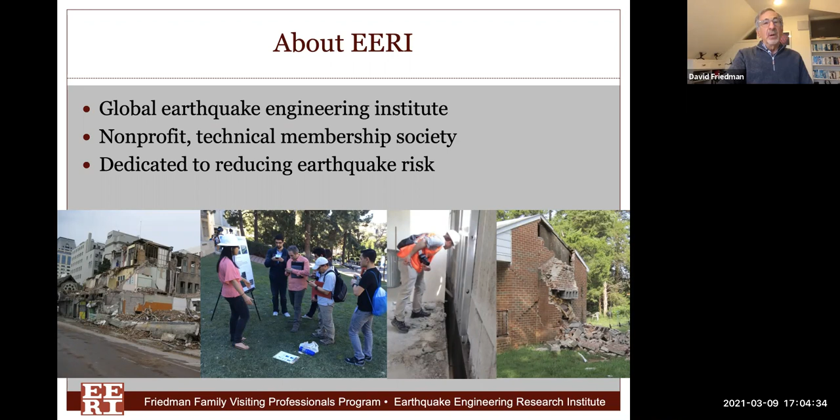Thank you. So, this is kind of a public service advertisement for EERI, but I got involved with EERI maybe 30 years ago, just as a volunteer. Became a member and started attending annual meetings, and then gradually got more and more involved. For those of you who don't know EERI, it's a global earthquake engineering technical organization. Its mission is really to advance the science and practice of earthquake engineering and reduce earthquake risk around the world.

The best part of EERI is who makes it up, and whatever discipline is our specialty, there is something about rubbing elbows and getting to meet people who come at earthquake engineering from different perspectives beyond your own. You see here who are the members. I found it particularly interesting meeting and getting to know and working with social scientists, people working on disaster planning and disaster recovery and kind of the human side of what happens after a natural disaster.

Particularly the Learning from Earthquakes program is really the program that kind of knocked my engineering blinders off and made me really understand that an earthquake doesn't just affect the buildings we design, but it affects whole neighborhoods, whole cities, and is a regional disaster.

There are many activities within EERI. For student members, and for after graduation, there are lots of ways of getting involved. There are regional chapters that are really very interesting to get involved with. I highly recommend it. I'm preaching to some of the already converted who are EERI student chapter members, but all of you, even if your discipline isn't necessarily earthquake engineering, I really think there's something about this organization that will set you on a learning path through your careers.

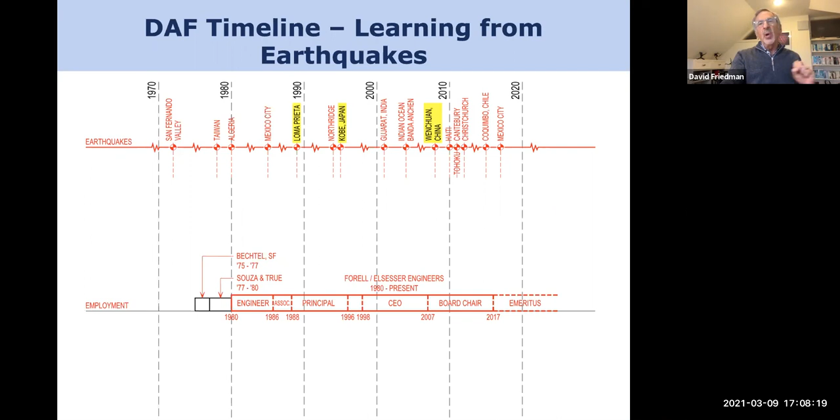I mentioned earthquakes, and I have added to my timeline the earthquakes, and not just the earthquakes that happened during this time period, but each one of them in some way or another affected my career. Affected my career relative to, I was on an EERI reconnaissance team, or there were significant code changes that happened because of those earthquakes. The first one is the Great Earthquake of San Francisco.

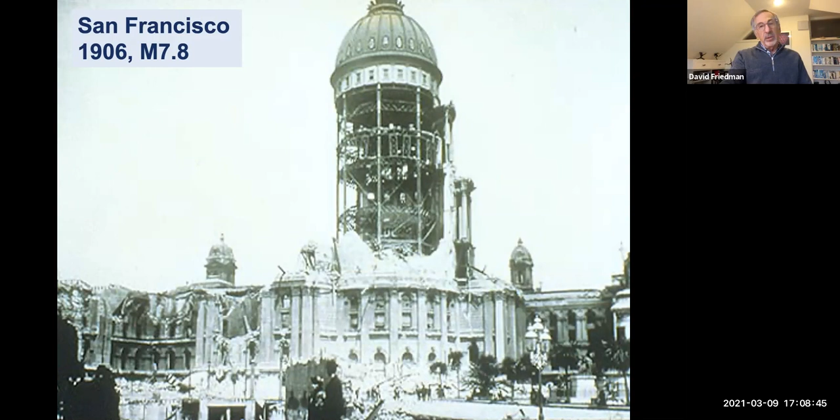No, I wasn't alive here, but little did I know that the replacement building was going to be one of the big projects of my career. What's very interesting about this earthquake was not just the ground shaking that lasted 63 seconds, but the fires that happened afterwards, adding to most of the destruction of the city.

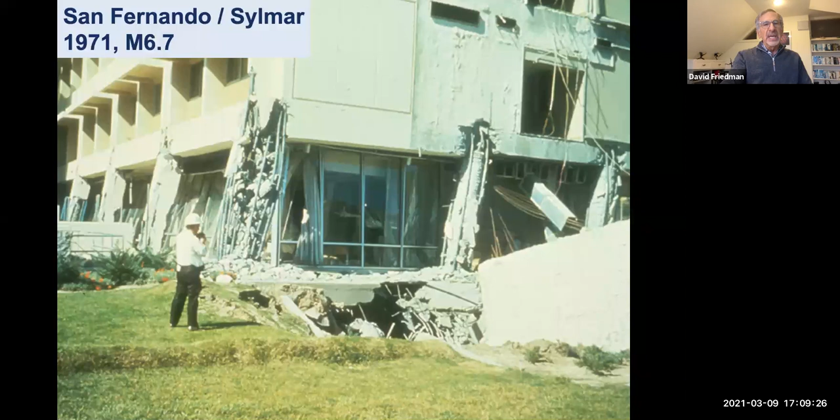1971, I was still in school, but this was the San Fernando Sylmar earthquake. What was important about this earthquake, photographed here, is the Olive View Hospital. It was after this earthquake that we changed our codes specifically for essential services buildings, that we knew that hospitals needed to have a better performance than shown here. I think also this was when we really woke up to the need for ductility in our designs. There was no transverse reinforcing in those columns.

The Loma Prieta earthquake. In a way, this earthquake was the bane of my existence professionally, because the earthquake was really not a big earthquake. It was maybe bigger for Santa Cruz, but not for San Francisco. Some celebrated damage, but it was also only 8 seconds of strong ground motion. If it had been twice as long, it would have been tenfold the amount of damage.

But so many clients, so many people I run into, building owners, say, my building survived the big one. And I went, really? This building was around in 1906? They say, no, 1989. So getting people to understand that that really was not a big earthquake has been really difficult.

Northridge, 1994, I was in practice at this point. There were maybe 7 or 8 parking structures that fell over, and it was just because of the aspect ratio of the diaphragms, not necessarily a strength issue or a shear resistance issue.

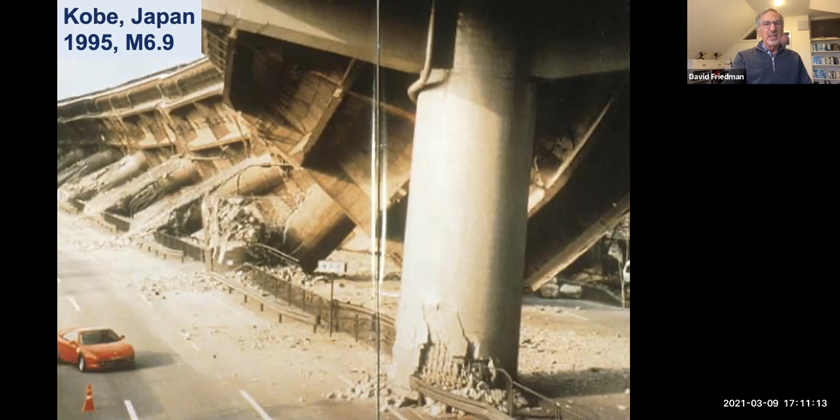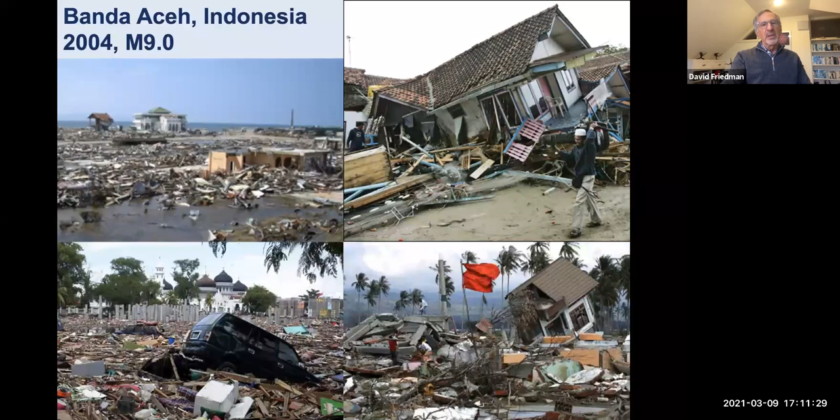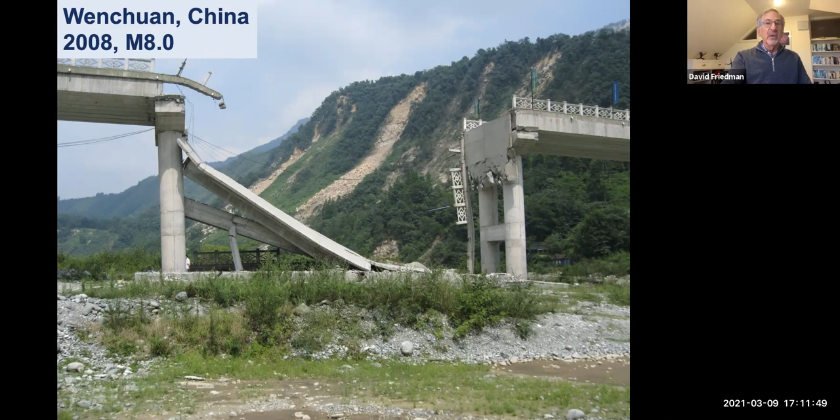Banda Aceh earthquake in 2004, we really didn't start talking about tsunamis until this earthquake. And this was the real story of this earthquake, the massive, massive tsunami that happened afterwards. Wenchuan, China, I was on this reconnaissance team as well. I think there are lots of lessons of this earthquake. A lot of it was the earthquake-induced landslides that happened in the region, in some cases so big that they wiped out entire cities.

Haiti, 2010. The tragedy of this earthquake, maybe the learnings weren't the code changes, but it was more the devastation that happened to this country, where they measured the amount of damage as 2.5 times the gross national product. And no wonder they've struggled to recover from this earthquake.

Christchurch is very interesting, a more contemporary earthquake in a country that has great codes and great engineers. There were actually 2 earthquakes within 4 months of each other. The second one was actually lesser magnitude, but was a shallow earthquake underneath the city of Christchurch and had a totally devastating impact.

And then Tohoku, Japan, this was another large magnitude earthquake, and of course the story of the tsunami. But one of the things that was really interesting about this earthquake was, we talk about earthquake magnitude, and people get fixated on what the magnitude is, but it's also the duration of strong ground motion. And in the case of the Tohoku earthquake, the strong ground motion lasted 2.5 minutes. So that's why there was so much non-structural damage far away in Tokyo, Japan.

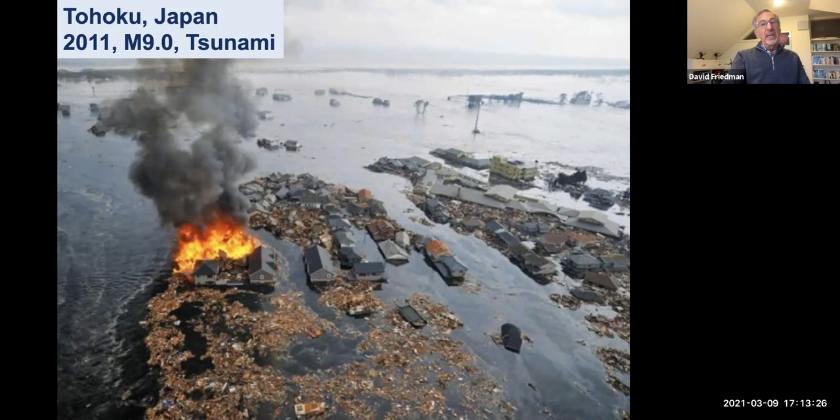Some lessons learned in my engineering career. My favorite definition of structural engineering is this: structural engineering is the art of molding materials we do not entirely understand into shapes we cannot precisely analyze, so as to withstand forces we cannot really assess, in such a way that the community at large has no reason to suspect the extent of our ignorance.

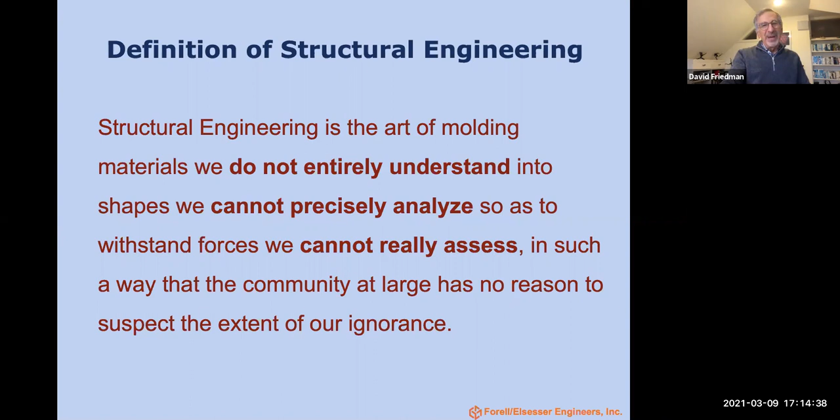Now, we're really not ignorant. We try to be quite educated and quite smart. But what this does talk about is there's a lot of uncertainty that we have no control over. I mentioned the earthquakes, the magnitude, the ground motion, the vibration content. But we also have to acknowledge that as we talk to people about what we do, there's a lot of things that we have to talk about in probabilistic terms. And once we talk in probabilistic terms, we lose people very quickly. And so we have to understand what it is we're trying to convey to people.

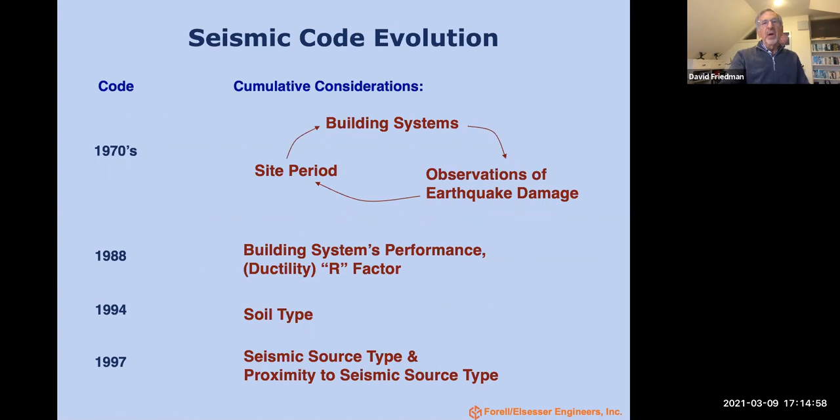Some of the issues that we face as structural engineers is the code, and the code's constantly changing. I mentioned we chase earthquakes around the world, we learn from them, and we change the codes. One thing that has never changed about the code, at least as far as the seismic provisions, is that it's a minimum standard. And what does that mean? Minimum standard is for life safety. It means that we design buildings so people can safely get out of the building. It doesn't mean you can get back in the building.

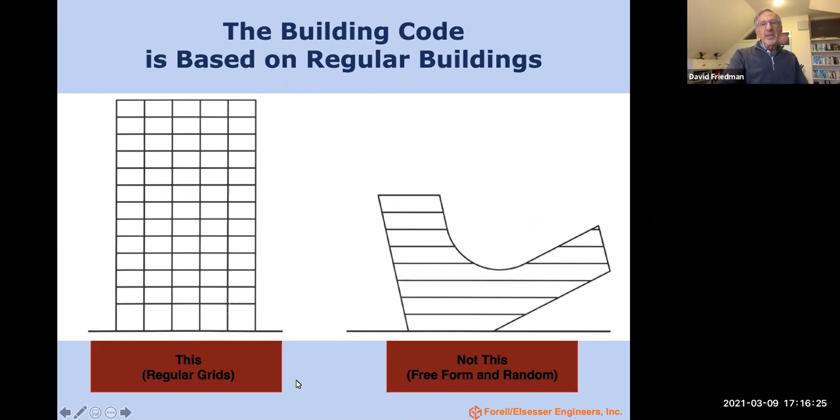The code also anticipates that we're designing regular shaped buildings; it doesn't quite as much envision the irregular buildings that architects like to design, like this, or like this. This is in Prague, Czech Republic. Some people think it's an after earthquake photograph, but that's the design. But our challenge as practicing engineers is to put regular systems, regular structures, to make these buildings stand up.

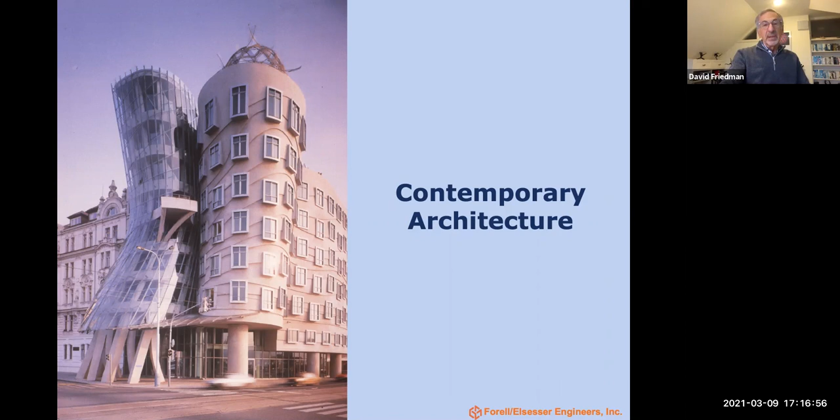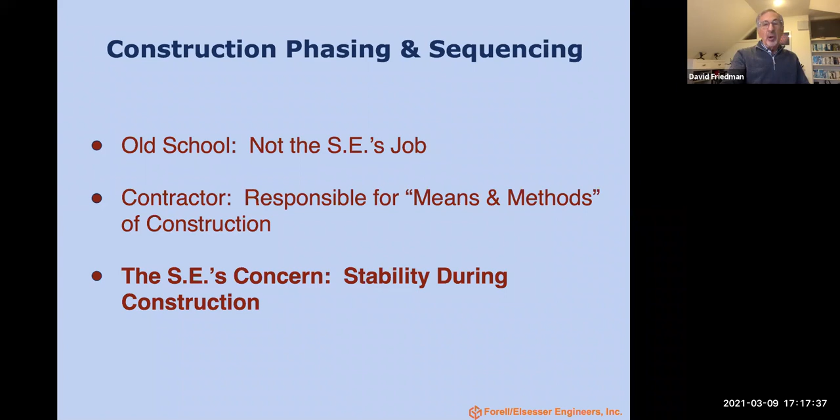You'll see when I talk about a couple of projects, engineers of record only promise their buildings are safe once the buildings are completed. But a large part of my project history was in seismic retrofits to historic buildings, and some of those buildings were in construction for 2.5 years. Generally, the engineers of record are not responsible for stability during the course of construction. But in some cases, we had to be concerned about stability during construction because of how long it was going to take. And I'll show you some of that in the San Francisco City Hall project.

Sustainability has become a big buzzword in design, in architecture. Usually sustainability refers to energy and energy use, energy design. But they kind of forgot about seismic sustainability along the way. And now seismic sustainability has given way to talking about resilience. How long does it take for a building or a community to recover? These have been some of the areas that later in my career I've become more and more impassioned about and an advocate for.

The other thing I want to impart to you is, engineers get a bad rap, maybe deserved, but they're considered not to be particularly articulate and literate. I think we actually are, and we can be, but we do have to acknowledge that we're in a tough position because we need to be able to explain what we do to a lay audience in a way that they can understand it. There's a number of times where you're writing a report and you have to understand who your audience is. So spelling and writing and speaking quality does count in professional practice.

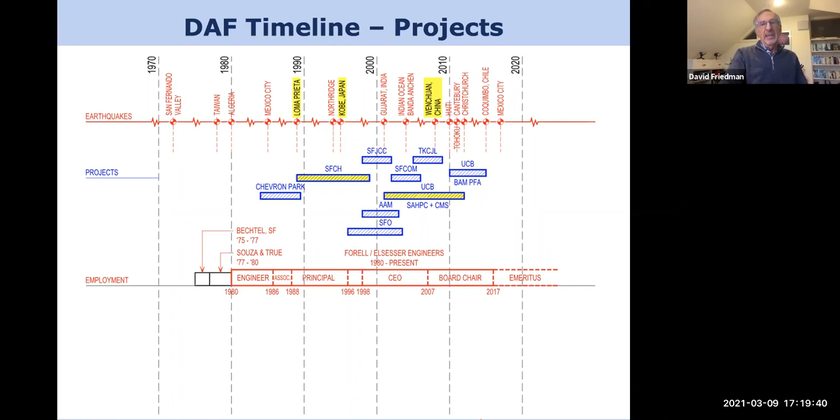So projects. I've done a lot of projects in my career. I'm really going to talk to you about 2.5: the San Francisco City Hall, this first project, which really consumed about 10 years of my career, and then the seismic safety corrections of California Memorial Stadium. And again, a lot of these earthquakes and code changes really impacted a lot of these projects. The first project I'm going to talk about is the base isolation retrofit of San Francisco City Hall.

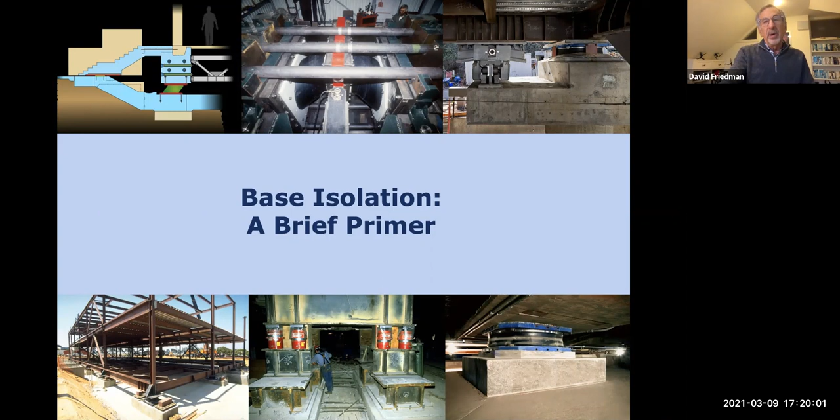I'm not going to assume that you all know exactly what base isolation is, so I'm going to give you a brief primer on what it is. So what are base isolators? There are really 3 kinds.

Bearings were used on bridges for a long time, but they really hadn't been used in an aseismic capacity. One of the most common types is a high damping rubber bearing, pictured on the left. There's some variation of it, the same kind of high damping rubber bearing with a lead core placed in the center of it that allows for more energy dissipation.

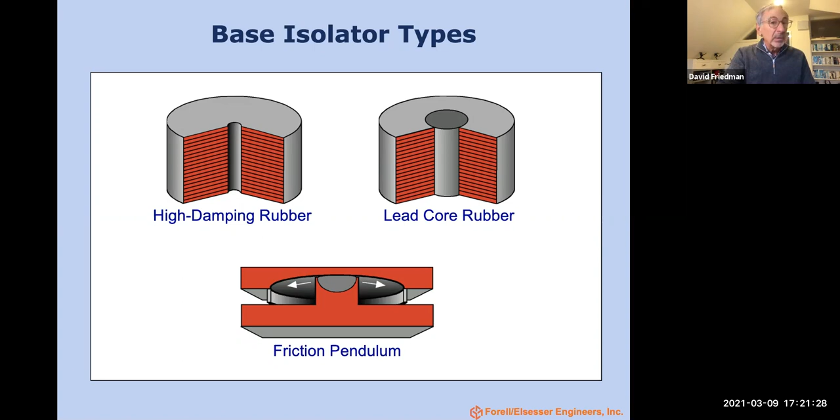And then there's the friction pendulum, kind of a different kind of concept. But all of these are vertically very stiff and laterally flexible, because this is where the energy of the earthquake gets dissipated. Order of magnitude of size: the high damping rubber can be 20 to 24 inches tall, 30 to 36 inches in diameter. The friction pendulums can be anywhere from 3 feet to 6 feet square, usually. We're agnostic as to what kinds we prefer.

There are two basic reasons why you base isolate a building. The first one is pictured here. Most fixed base buildings, and a fixed base building is anything other than a base isolated building, are going to withstand interstory drift. From floor to floor, the deflection of the building is going to cause it to drift, and that drift is what causes damage in the building. When you base isolate the building, most of that deformation is happening in the isolators. And so you have to design a building for a lot less interstory drift, because the whole building is moving more monolithically.

The other reason that we base isolate a building is because of the period shift. So again, most fixed base buildings are in this lime green zone. A lot of the buildings we design are in the half a second to 1 second fundamental period of vibration range, and that puts you right at the peak of the response spectrum. But the base isolators have a fundamental period of vibration of between 2 and 3 seconds.

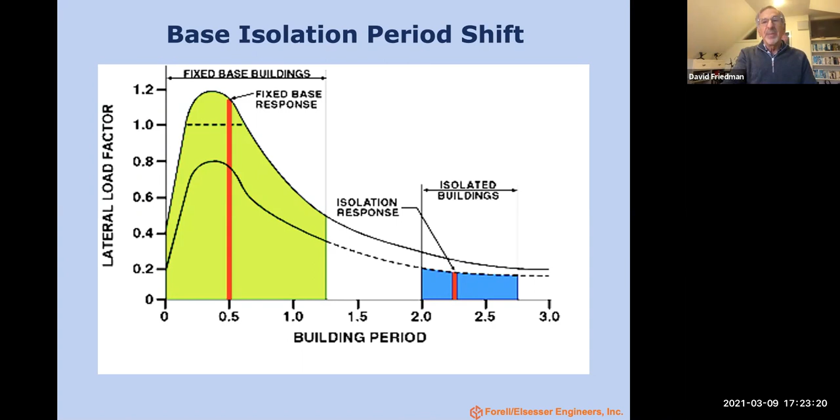So if you read across, with a fixed base building, you get something like a 1.1 G lateral acceleration, but in a base isolated building, you get about 0.2 G. So you can see the benefit of the period shift and the reduction in spectral acceleration on the building. So that's essentially why we do it.

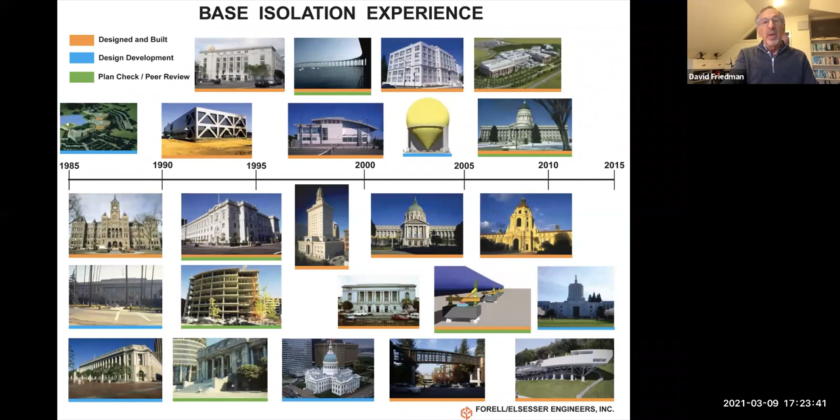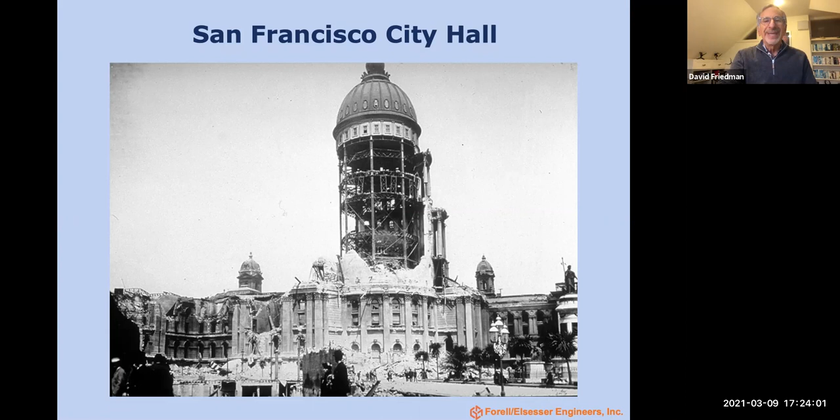We started doing base isolation retrofits. The very first one was a city and county building in Salt Lake City, which was the precursor to the next one we did, which was San Francisco City Hall. This is San Francisco City Hall, the building that was built in 1915 after the destruction of the building that I showed you in 1906. This shows again the damage where most of the brick cladding had been shaken free of the building.

This shows basically what we did in the retrofit of the building, and all I'm really going to talk to you about is the base isolators at the base and how we got them in. It involved putting in new foundation systems, creating this isolation plane, cutting the columns, tucking in the isolators. But then we also had some strengthening to do in the light courts on each side of the rotunda and the drum and the dome of the building. You can see in red some of the steel transfer systems and strengthening of the drum that supports the dome of the building.

This was actually the main reason why we base isolated the building, because had we done a fixed base, we would have actually had to have strengthened or rebuilt the entire dome, the inner dome and the outer dome, and that would have been cost prohibitive. So remember, we were doing this in the late 80s, early 1990s, and we were trying to explain to a client what it is we were doing.

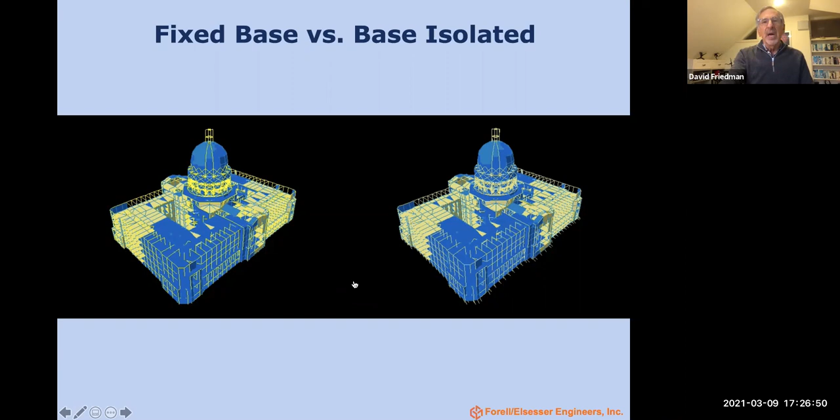The main trick here was, how do you get the isolators in? A lot of our detailing had to be around the sequence of construction. I mentioned that we certainly weren't making the building a lot stronger. In fact, during demolition at the first floor, we were taking out a lot of brick and terracotta walls, so we were actually making the building weaker.

So we designed a rather large temporary bracing, which was all around the building. We felt we needed to design it ourselves because we'd design it to a different level than the contractor would have, who would probably have installed some rod bracing that wouldn't have worked. What you're seeing in this photograph is we've done a lot of excavation around the existing footings, put reinforcing in, and scraped off the concrete fireproofing to expose the lead paint on the steel columns.

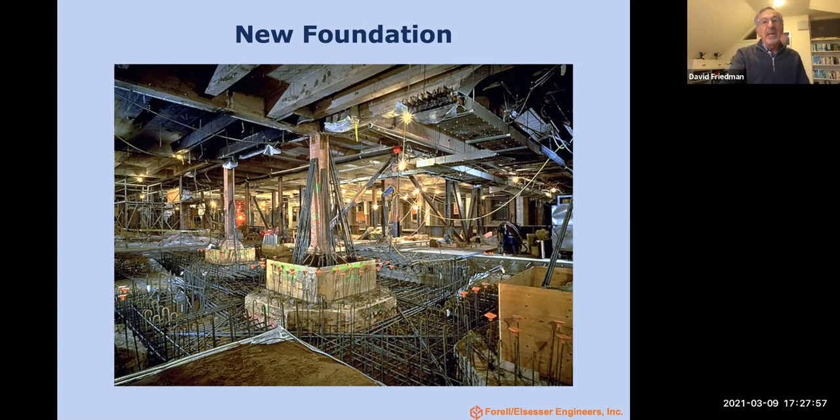Here you're beginning to see a number of things happening. You can see where we've scraped off the paint. They've installed these very, very stiff steel beams that clamp and sandwich the column. They're supported on spreader beams here, and then these are the hydraulic jacks. You can see this is the apparatus getting started.

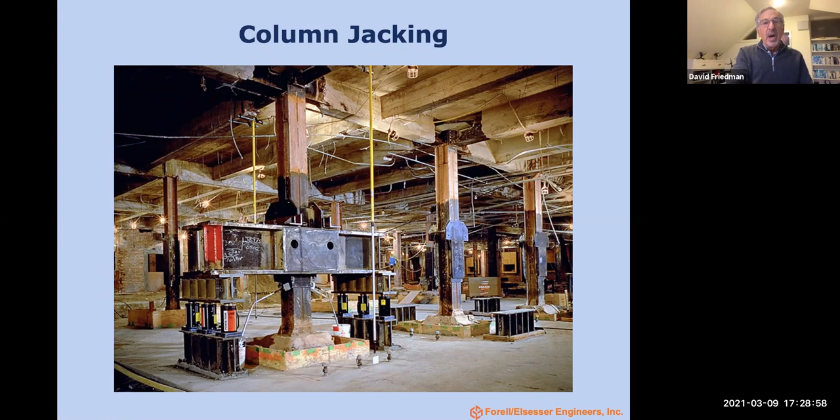In each of the 4 quadrants of the building, we limited ourselves to only doing 3 columns at a time. Once this apparatus was in place and clamped, there was a load bypass, meaning the load coming down to the column, by the stiffness in these girders, was being transferred here, so we could activate these jacks and infinitesimally jack this up to release any load coming into the column.

Then we come in and cut the column here. Then we eliminated the old foundation that was there, poured a new foundation, and put in setting plates for the new isolators. These pictured here are the columns, the 5 columns that support the rotunda.

So each of these had 4 isolators in them. Over here on the left, you can see an isolator has been installed. You can see the beginning of what we call the cruciform steel floor framing, vertically very stiff because they're only 14-inch deep girders, where we use column sections for the floor because we're fighting for every inch here.

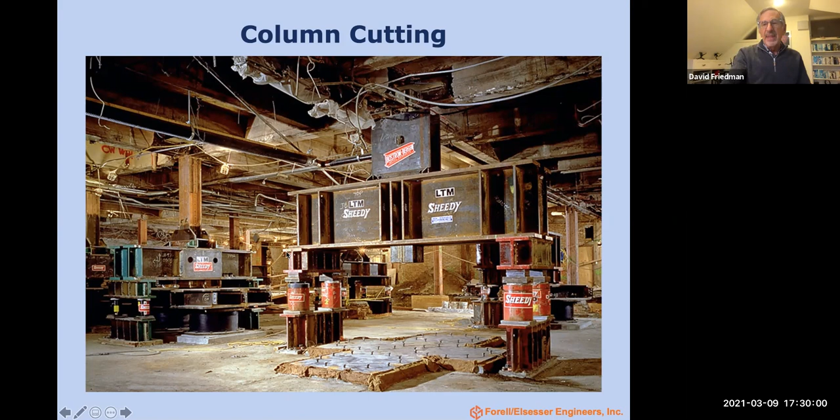This shows a whole row of columns ready to go. The isolators are in, the cruciforms, and more floor framing would be attached to these. Interesting here is each isolator had a locking plate. There are 538 isolators in San Francisco City Hall.

I may have that number wrong, but these locking plates were important because until we had all the isolators in, until we had the floor completed and the concrete diaphragm in, and in fact the rest of the strengthening of the superstructure of the building, we didn't want the isolators activated. So only after the project was done did they have to go into the crawl space and remove all of these locking plates. This is more of the floor framing in.

Again, that isolator plane was competing for a lot of space. We also had to be able to come in and inspect and remove every isolator. So there are access ports located throughout the building to be able to inspect the isolators after an earthquake, and they're required by code to be tested, or at least a couple of the isolators tested, at every 5-year increment.

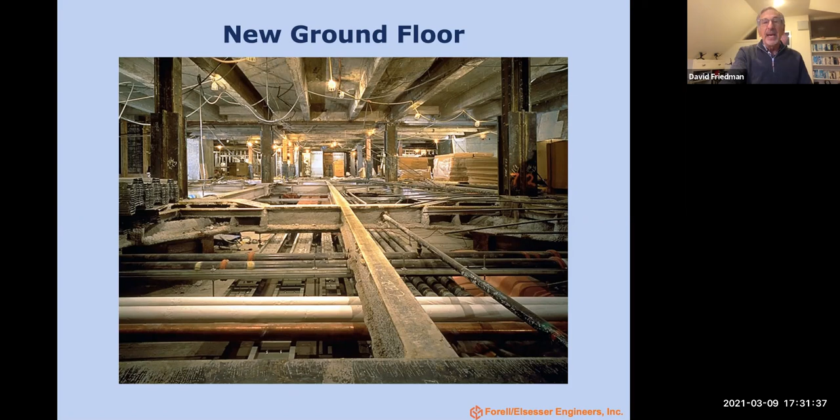I'm going to show you very quickly one other project. The story here is this was a different delivery system, what we call design build. So there was an architect, an engineer, and a contractor design team involved in the project before us, and then it was handed over to the engineers of record. Basically that is to find some efficiencies in the design of the building.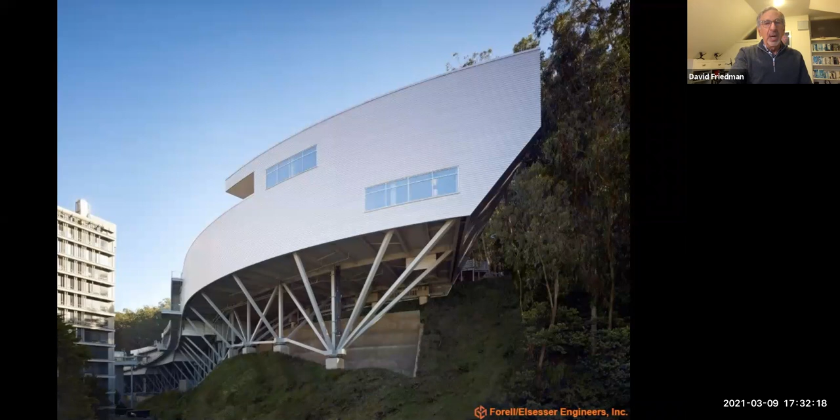This building, this is a finish shot. This was one of the most difficult projects we worked on from a site perspective and architectural perspective, because they came up with a very serpentine building.

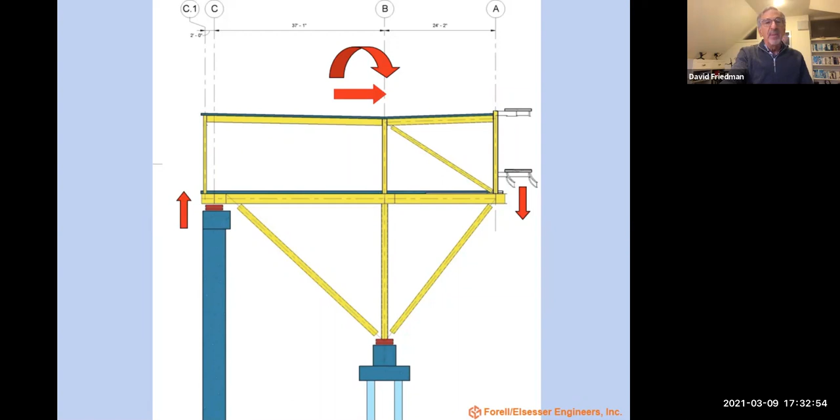They had already decided that this building would be base isolated. They'd already procured the friction pendulums for this, but they hadn't solved one issue, which was the overturning on the isolators. Because of the small aspect ratio, this was not a heavy building, so there was a net uplift on the isolators.

The isolators, again, these were what we call the triple friction pendulums. Their uplift restraint were these little strapping devices. And for the excursions these isolators were going to undergo, those strapping devices weren't going to survive, let alone be there for any uplift resistance.

So we had to solve this problem, and we had to be more mechanical engineers than structural engineers. One of our engineers had an idea of how to make a restraint. Over a weekend, he took his son's rollerblades apart and came up with this concept.

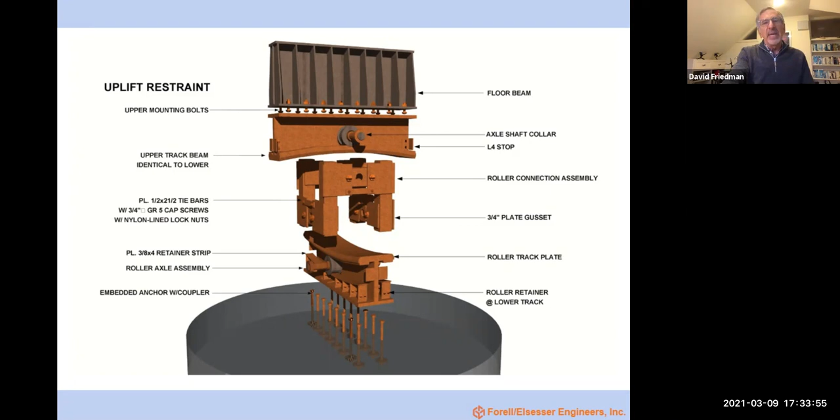That concept turned into a mechanical system able to handle the three-dimensional motion and provide a clamping so that the uplift could be restrained. It wasn't done within the isolator, it was done adjacent, which is why we have very stiff load transfer elements here, but this was the actual uplift restraint.

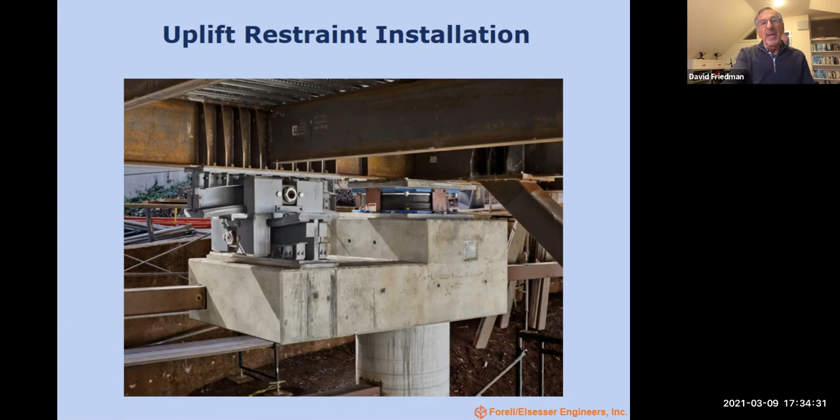Again, you can see even in the friction pendulums, we had these same locking constraints in the building so that it was locked in until the building was completed.

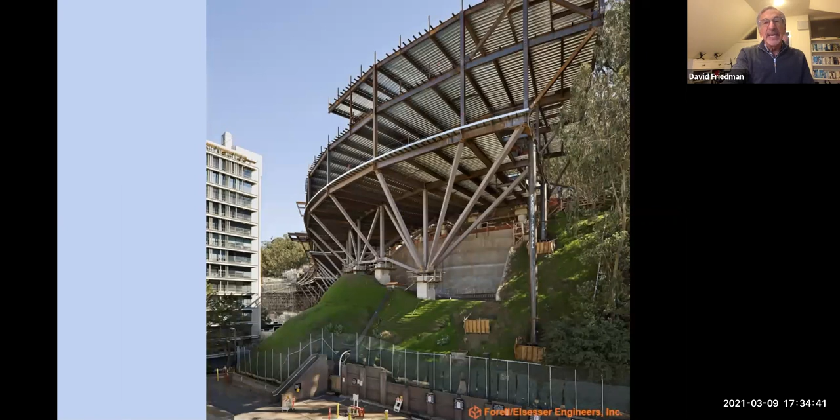We had to test these down at UC San Diego. This is actually the finish of the structure. I kind of thought it looked like a piece of art and kind of wish they had just stopped there. But again, look at the serpentine nature of that building. When we started this project as the engineers of record, there was a problem we didn't know we were going to have to solve, but we did.

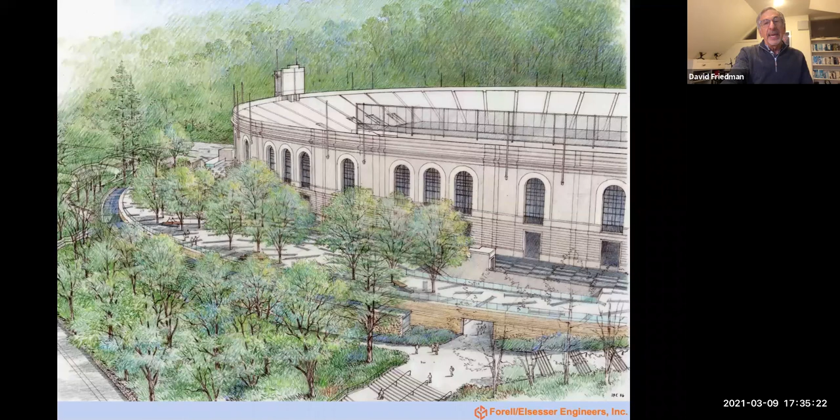California Memorial Stadium. This was another 10-year spanning project in my career. There were actually two projects. One was a high performance student athlete building, a crescent-shaped building in front of the building. That was done first to decant the building.

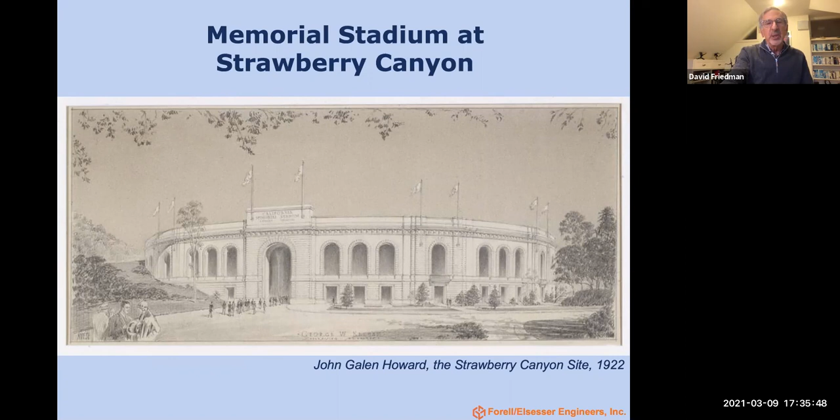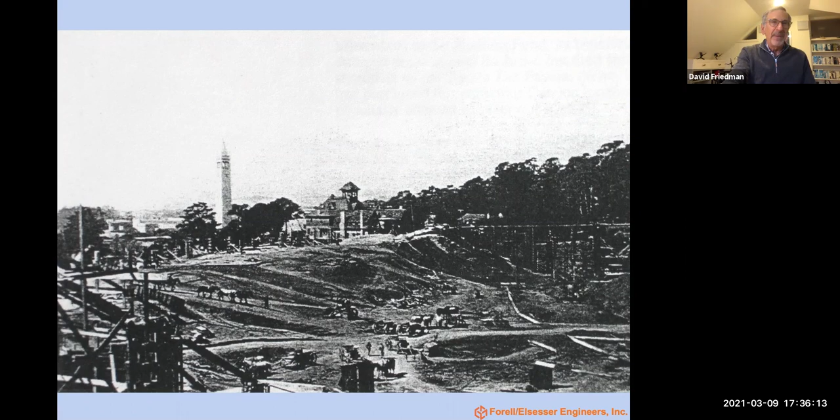This project took 22 months, and maybe about 3 years to design. It wasn't helped by the fact that we were delayed by a large amount of litigation from the city and the neighborhood association. This shows part of the West Bowl, which was a non-ductile concrete structure.

Many of you know of the seismic activity in the Bay Area. We were dealing with the active Hayward fault. We knew that the fault was there, and we knew it ran under the stadium, but we didn't know exactly where it was.

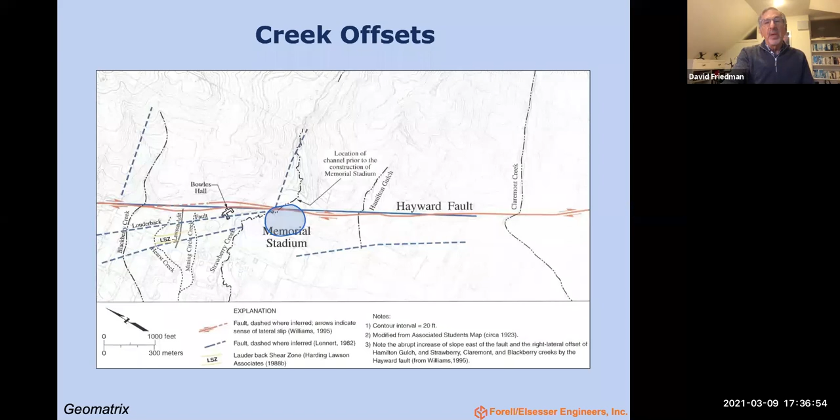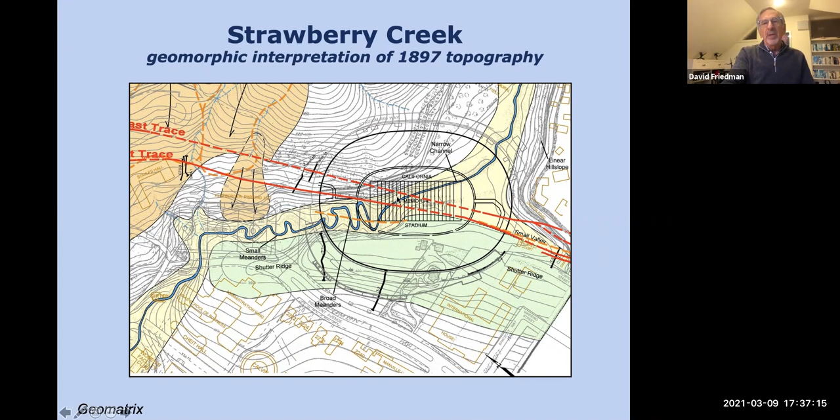We were forced to do a fair amount of trenching, particularly for that precursor project, to make sure we weren't getting faulting activity under a new building, because you're not allowed to build a new building on top of an active fault. We knew the fault was somewhere in these areas. In green were the trenches that were dug. These trenches resulted from litigation, basically to prove the fault was where we thought it was, and not where we thought it wasn't.

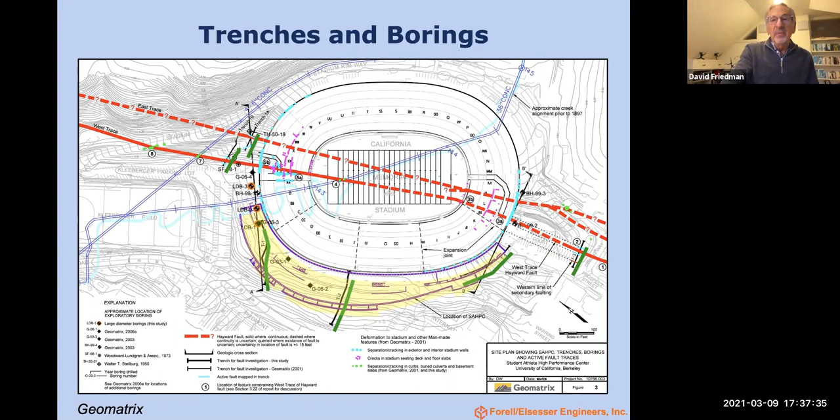Luckily, this trench showed the fault, and the geotechnical engineers loved getting in, and they were very skilled at mapping the soils. When they saw this clear delineation between soil types, that was an indication of the zone of where the fault was. So approximately that red line is where the fault is, running almost north to south, a little bit diagonally.

The issue with the fault is not the ground shaking. We know that's going to happen, we're in a near fault zone, and it's going to be intense ground shaking. But the real issue was fault rupture and displacement. The geotechnical engineers told us that the displacement would be as much as 6 feet horizontally and up to 3 feet vertically.

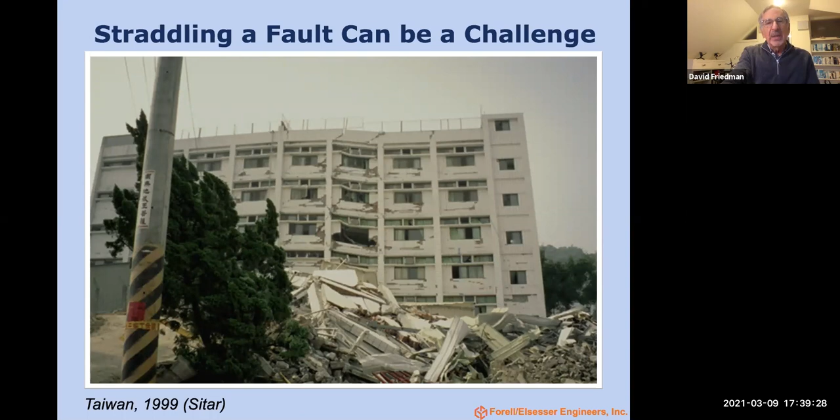This was a building in Taiwan. There were actually 2 buildings. The first one collapsed, and right along this plane is where the fault was rupturing. The issue with this building was that it was pile supported. The piles locked the foundation well into the ground. That told us something—even nature tries to tell us something.

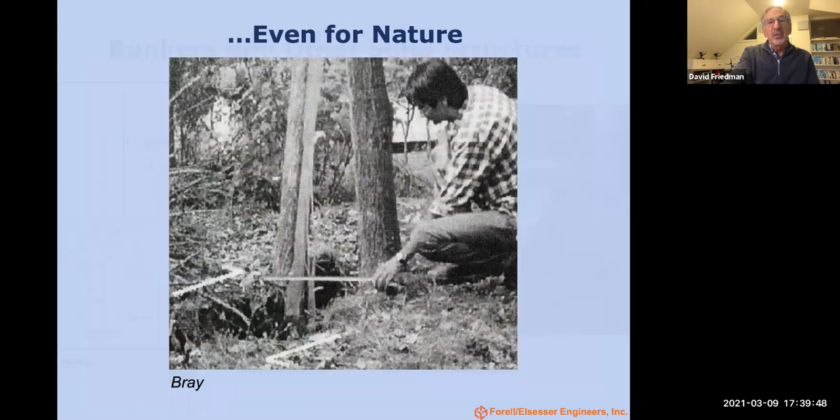When you consider the way the fault rupture went up the tree trunk, think about the root system as locking the tree into that structure. There were some good examples of little bunker-like buildings that had a ribbed or mat-like slab that was very level, and all that happened to this little building was that it rotated and tilted a little bit.

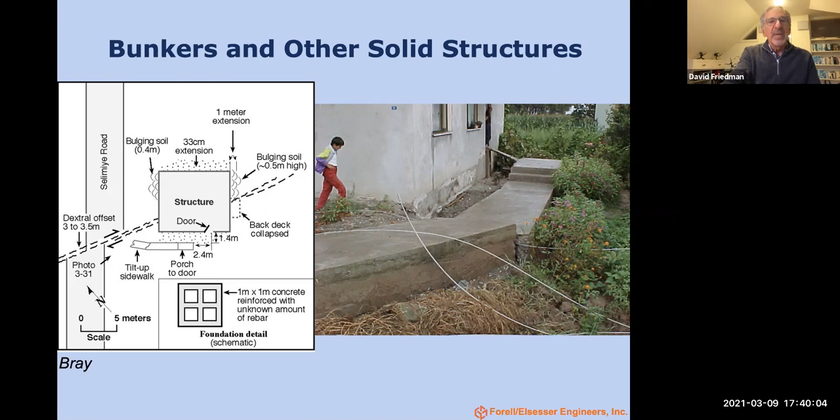So that gave us our first clue as to what, before we started modeling anything, we came up with a concept. The concept was that we were going to create these fault rupture blocks. The block would be very stiff, would have shear walls in it, but it would be jointed on each side. That joint, different from a normal seismic joint, would run completely through the foundation. It would sit on a mat foundation that would be very rigid and level, and we would put it on a couple of layers of plastic sheeting just to help it a little bit.

Because the behavior that we were looking for was when the fault ruptured, we would want it to rotate or tilt a little bit. After all, what we were after, what the code was after, was life safety. We weren't trying to do something—everyone expected us to base isolate this building, but in fact we used really basic statics on this.

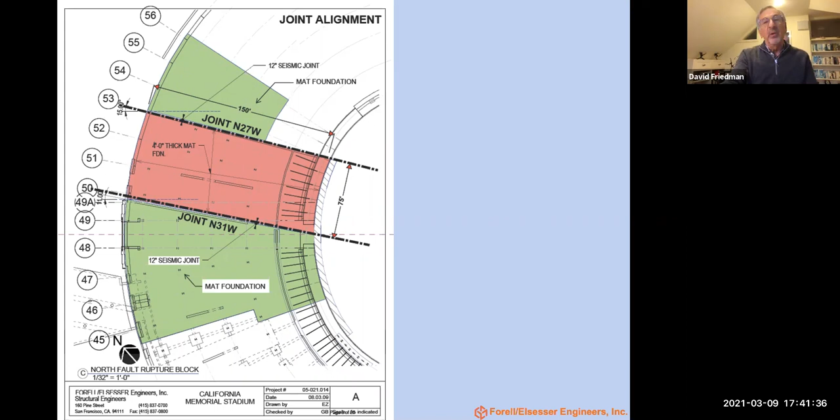The big issue, so we had one in the north and in the south. We had a fault rupture block. It was informed by the geotechs, who gave us not only where the highest probability of the fault rupture was, but what angle it was going to act at.

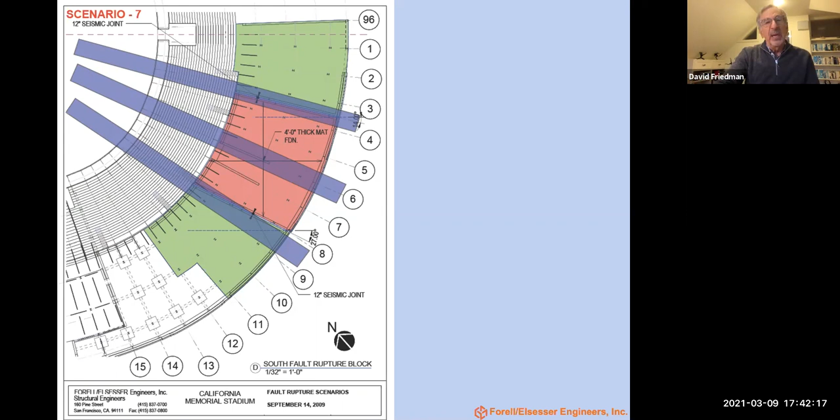So then we started more of our modeling, and we also took into account different parametric studies, asking not only what if the fault ruptured here, but what if it happened over here. In this case it was a study where we said it would be a series of ruptures in this zone, and maybe the geotechs were wrong and it would fall outside of the zone that they predicted. That did lead us to decide, in the green zone, to at least put in a heavier mat slab foundation in that area.

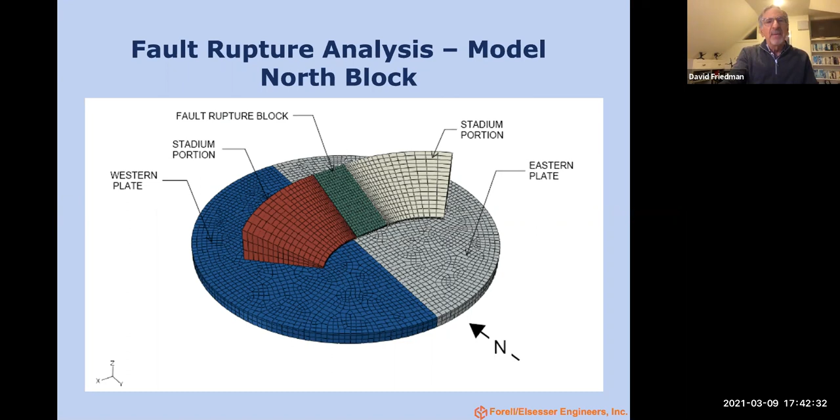We used a finite element model to study the behavior of this. We used Abaqus to do this kind of finite mesh analysis. We also did a physical model. The physical model was the suggestion of the Seismic Review Committee at Berkeley.

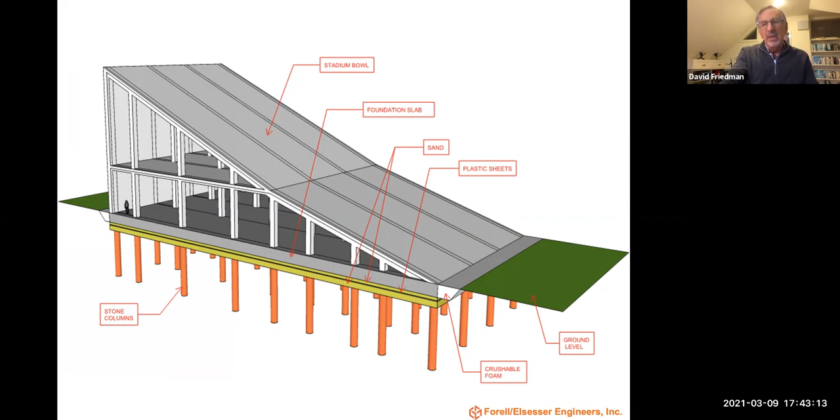We thought it was a not-so-high-tech suggestion, but they said, sure, we'll do a physical model—how do you suggest we do that? And they said, well, you're the engineers of record, you figure it out. But we actually did figure out a really fun, crude physical model, and we compared it somewhat to our analytical models, and it gave us similar results, order of magnitude.

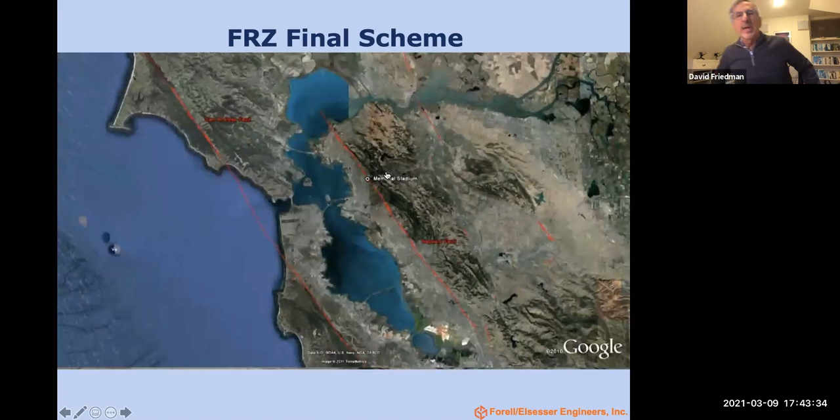Again, we're trying to communicate what we're trying to do to a client, a lay audience. So we made this kind of Google Earth zoom in. Sorry, let me start it again. There's going to be three views. It's really the third view that really demonstrates the behaviors we were looking for.

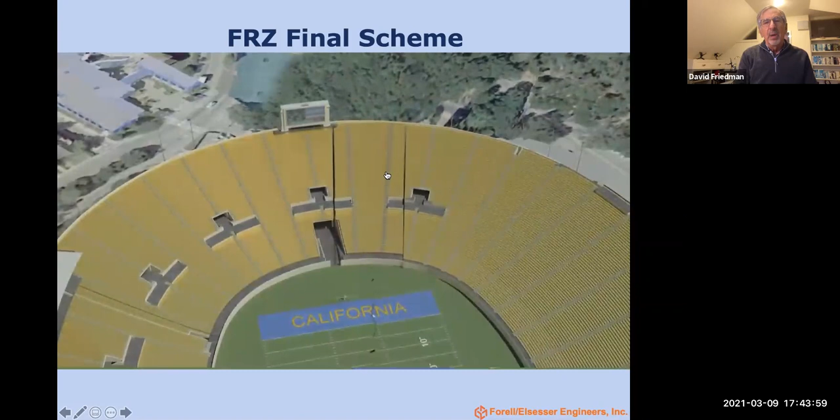You'll see it's a little pixelated at first, but you'll see that we mimic a little bit of shaking, and then in the stadium bowl you'll see a little rupture. But this is a slightly better view where you'll see the fault rupturing in the stadium and that block rotating and tilting a little bit. This is the better view.

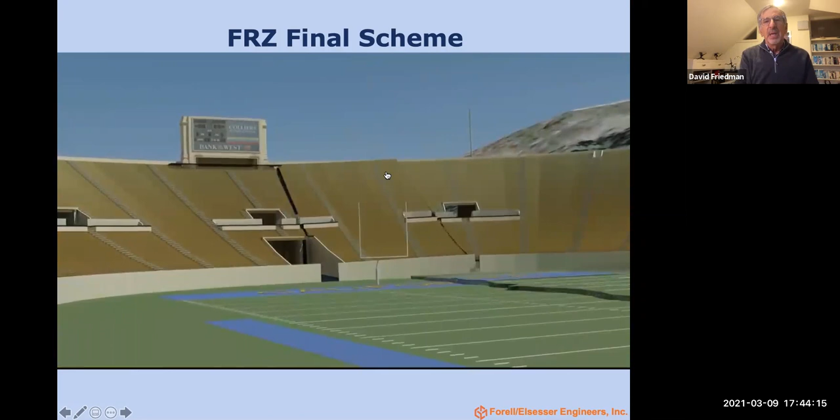Again, we don't expect it to be particularly dramatic. The people sitting in that section, should there be an earthquake on one of the five fall afternoons where there's a game, they probably will be more preoccupied with the ground shaking than that translation of what's happening to the bowl they're sitting in. But we spent a lot of time on that fault rupture solution, because the west bowl of the stadium also had this big press box lacing through it.

This press box basically runs from end zone to end zone. It's 330 feet long. Its vertical span is only 110 feet, but its lateral span is between the two pairs of concrete cores. And then there was the stadium bowl around it.

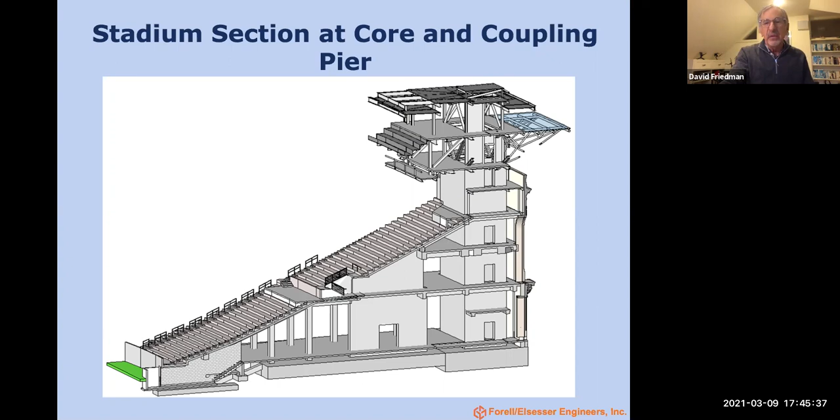But we were pretty complacent. I wouldn't call us smug, but we'd retrofitted lots of non-ductile concrete structures before, and we thought, we can do this, this will be easy. We were quite wrong. I take this as an example to you, just because you don't always get too locked in on what your solution is going to be.

So this is a cross section, a transverse section through a radial wall of the stadium and one of those core walls. These transverse walls happen more frequently than the core towers do. But we ran this triangulated element as a very stiff element, and this inverted pendulum is rather flexible.

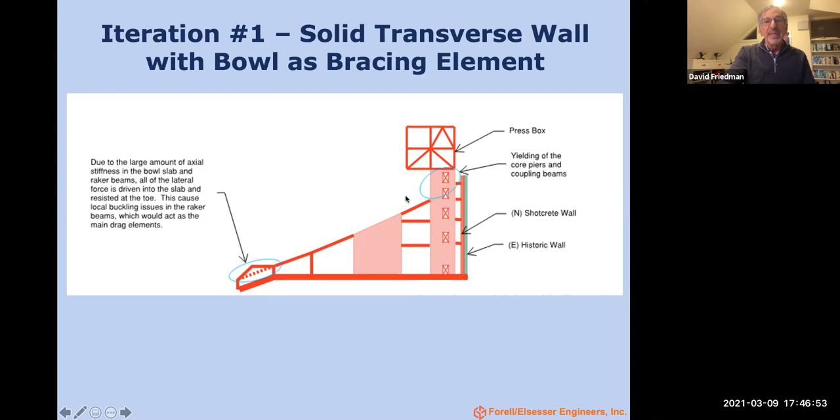So what did we learn? We learned that because of the axial stiffness of the bowl slab and the raker beams, we were getting buckling in this element here. We're also getting yielding of the core piers in these elements. And we said that's not good.

So the first thing we did is put in a slider here, to release that slab and raker beam, so we did not get the kind of rupture, and we put a little ductility into these core walls. But we were still getting yielding of the core piers. So we said, well, that's not good.

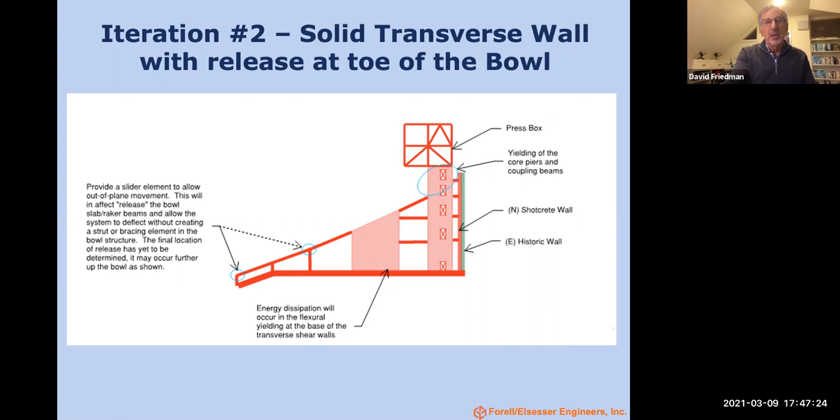So maybe we need a little bit more energy dissipation in the system. So we decided to put a very large opening. It's the first time I'd ever gone to an architect and asked for an opening in a shear wall. Usually it's the other way around. But this way we thought we could get enough ductility in the system, but it still didn't work very well.

So finally we said, why are we fighting it? Why don't we let the two buildings, because they were really two buildings, why don't we separate them, let them behave differently? And that was kind of an aha moment, where we thought that was the right thing to do.

But then we had to give it a little bit more strength. So we turned those core walls into rocking piers, we vertically post-tensioned them, and they became rocking piers for the energy dissipation. We did put a collar around the slabs to make sure that we controlled it.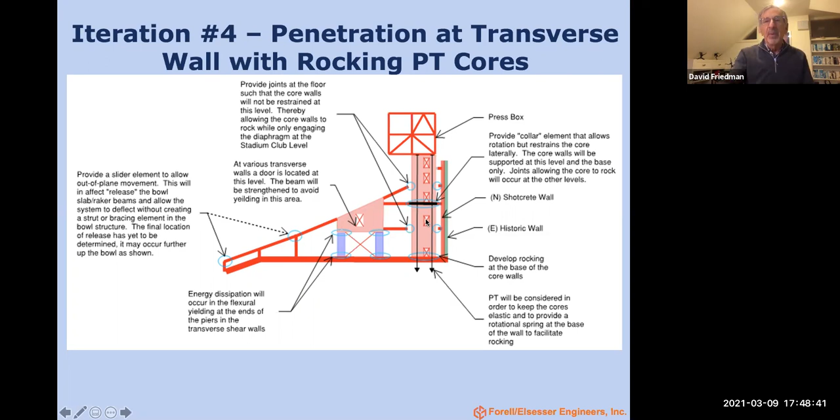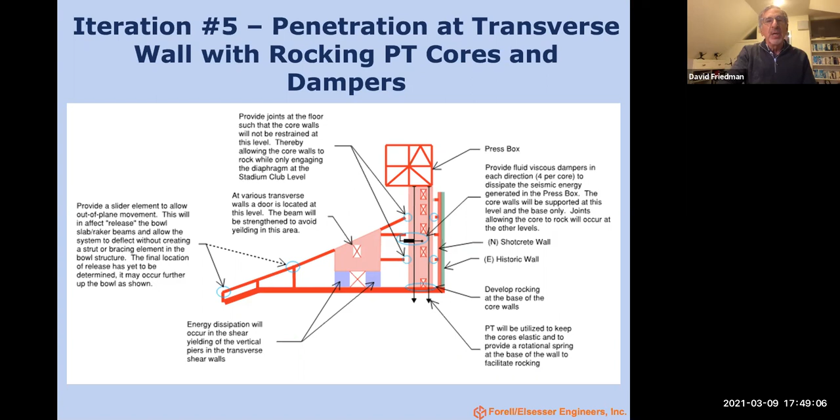But then we had one more thing up our sleeve. We decided to put in viscous dampers to help control the differential motion between the two buildings. So whereas everyone expected us to throw in the bells and whistles into the fault rupture issue, it was really here where we used every engineering trick we possibly could.

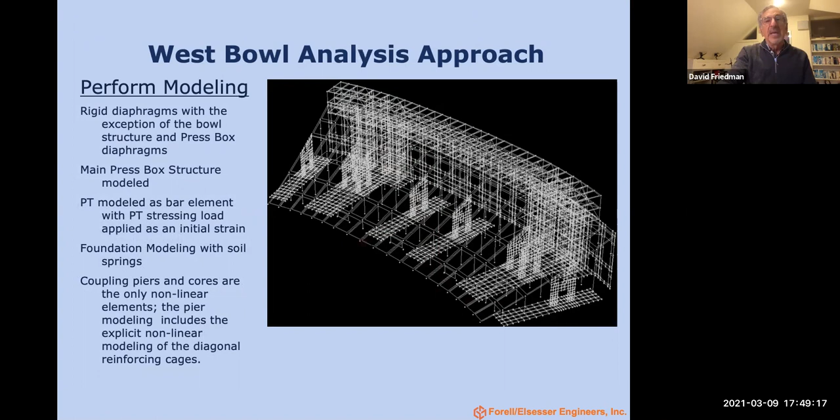We again used a finite element study to see the nonlinear behavior of these, and again we did a little animation to show the client. This doesn't really scale very well, but you basically see how much the core and the press box is moving relative to the relatively stiff bowl structure.

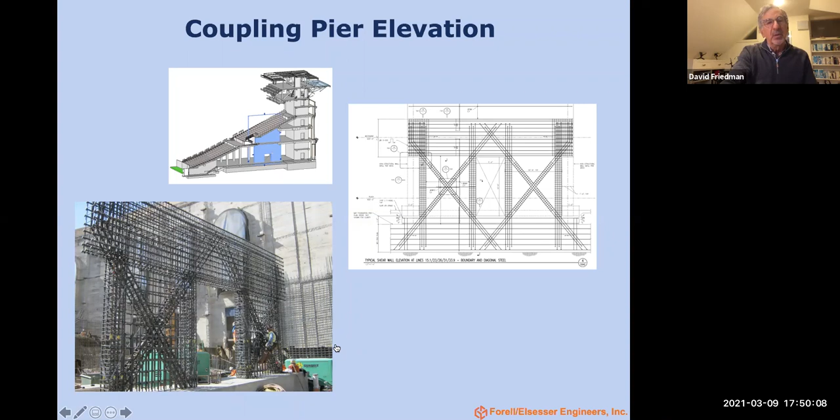Construction is always kind of the fun part, though you always run into problems, but you also think about construction process as you go. I love showing this picture of the radial shear walls in the building to people on the East Coast, because they're just awestruck by how much reinforcing steel goes into those coupling piers.

And then the details of those rocking piers. The vertical post-tensioning went into these sleeves. Here's a picture of the sleeves here. And then all of these number 11 bars are meant to resist a thrust. And this is the mat footing. The mat footing is, I believe, 7 feet thick.

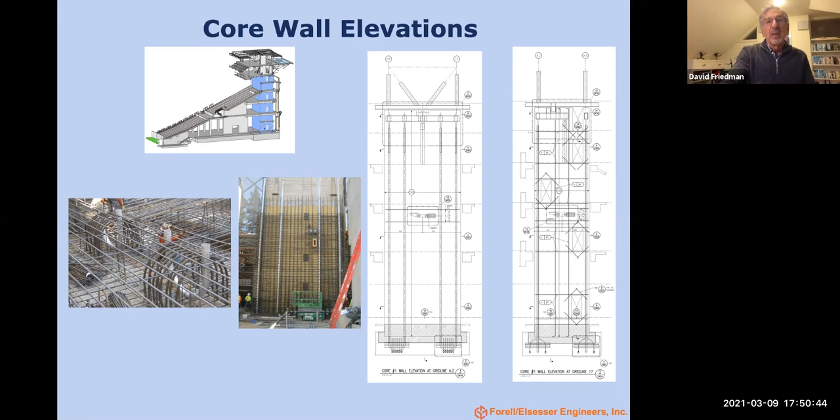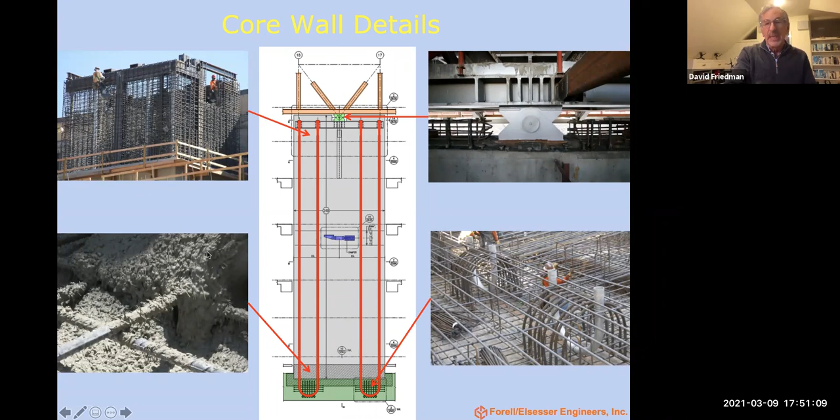This is where a lot of the transfer is happening. This is where the steel press box is connecting to the core walls. We have a 7-inch diameter, 100 KSI pin, 4 of them at each core. And then, I don't know if I have a picture of the damper. Maybe I do, coming up.

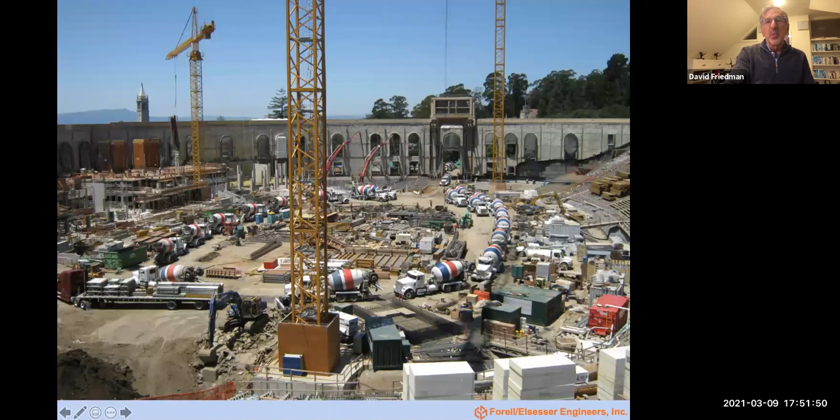The tricky thing about this project, construction-wise, is every piece of material out, every piece of material in, all had to come in through the North Memorial Arch. And in fact, we had a contest one day, during one of the largest foundation pours, of who could take a photo of the most concrete trucks. Our person who was permanently on site took the photo.

This shows the West Bowl slab framework going in. Once we got that in, we were able to take out the 2 eastern tower cranes.

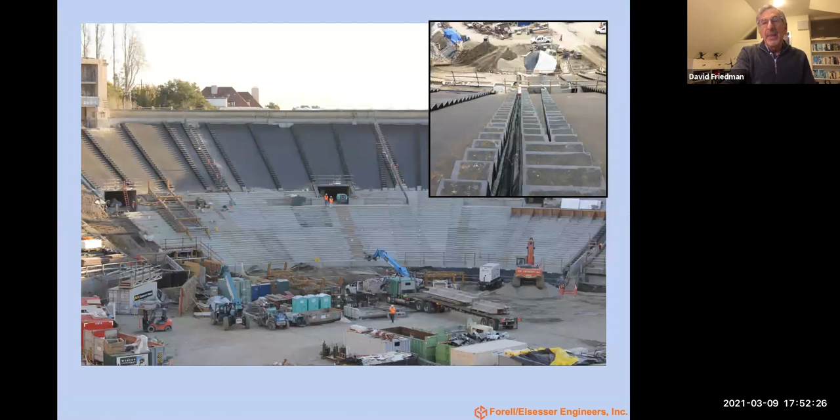And then this actually shows the south fault rupture block. So you see the joints, and the joints are 12-inch joints, again, the joints that go all the way through the foundation. And this is the other side of the joint. You might notice that the grid of the stadium, the radial grid, is different than the angle of the joint.

The architects were rather upset with us when we told them that we were going to put the joints where they needed to be, based on where nature was likely to rupture. They fought us tooth and nail on it, until we explained that if we put the joint on the grid, the joint would be twice as large. So they were pretty happy with the 12-inch joint.

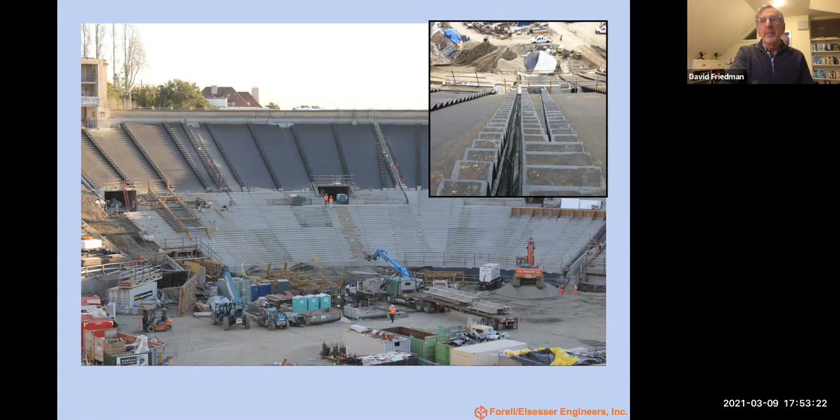This was the first tier of the press box. The press box was fabricated in Stockton, actually all put together there in 5 sections and then taken apart. It was trucked into the stadium through that North Memorial Arch, and then reassembled to make sure that it all still fit.

And then they brought in this yellow crane. This yellow crane was used to assemble this crane. This crane was brought in on 72 flatbed trucks, assembled in place. And then...

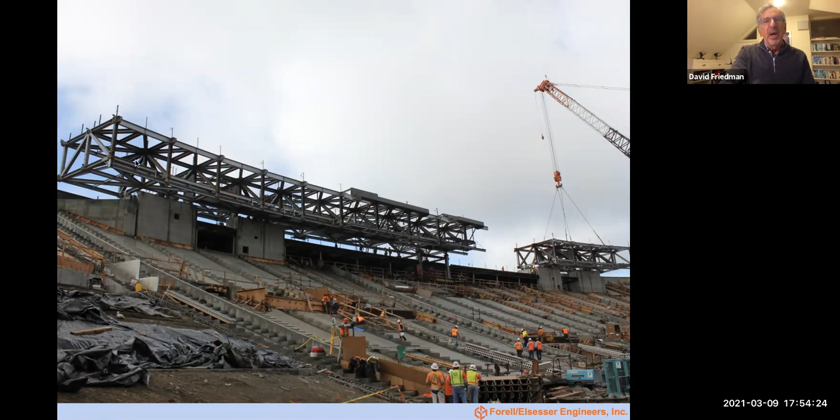it, in turn, picked up each of these 5 segments of the lower tier of the press box. Again, here the span looks like it's more longitudinal, but we actually designed these as space frames with a transverse orientation because we knew that they were going to be picking these up in sections. Probably, if it was shored, which it really couldn't be because that wouldn't have allowed us to build the stadium bowl in advance. But this very much affected even our steel detailing.

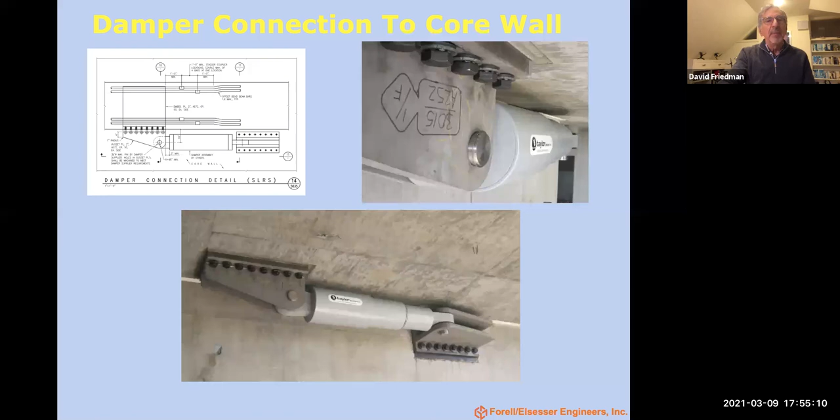Along the way, here's a photograph of the installed viscous dampers that were in the stadium.

And last but not least, it's back to my timeline. At the bottom, I put on both my professional activities and civic community activities. I highly recommend that, whether you're in academia or in professional practice, you get involved in these organizations. One, you meet the nicest people, but you also learn a lot about teamwork, about what people are trying to do.

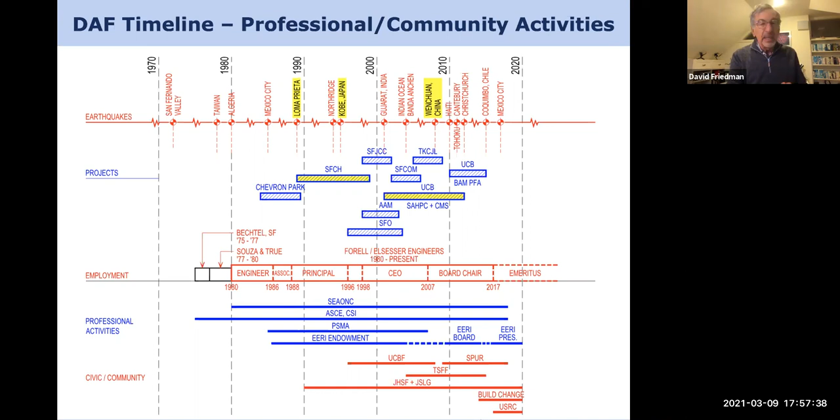So I tried to do this in an hour, and I think I'm almost there, but I hope you have some questions for me. I wanted to leave some time to allow for questions.